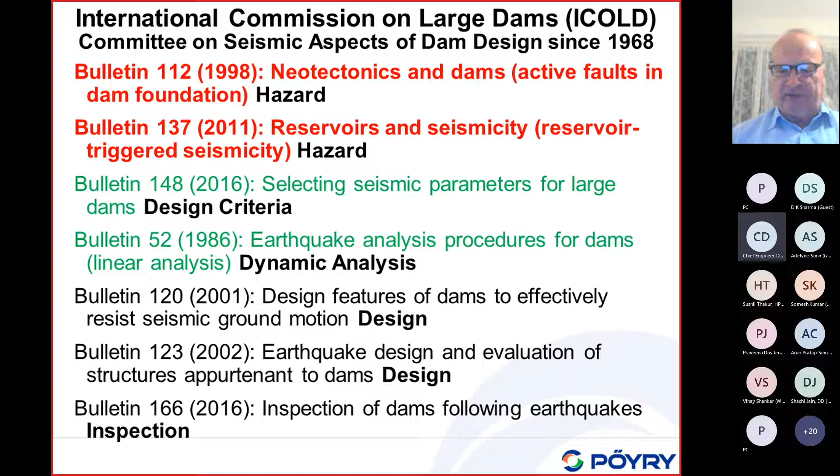Now, the presentations I'm planning to give today and tomorrow are as follows. First, I would like to give some comments on seismic waves in reservoirs, because there are quite some misunderstandings about these. Number two, I will talk about dam safety aspects of reservoir triggered seismicity. Number three, I will talk about seismically active faults and discontinuities in dam foundations and reservoirs. Number four, I will talk about design aspects of Rudbar-Lorestan Dam in Iran, located in a narrow canyon with multiple faults and discontinuities which could be activated during strong nearby earthquakes. Number five, I will say a few words about innovations for a dam on an active fault and high reservoir sedimentation hazard in the Himalayas. And the last one, I will say something about dynamic stability analysis of a gravity dam subjected to the safety evaluation earthquake ground motion. This is also a subject which could not be delivered during the previous workshop number two due to the technical problems we encountered at the end of the second day of this seminar.

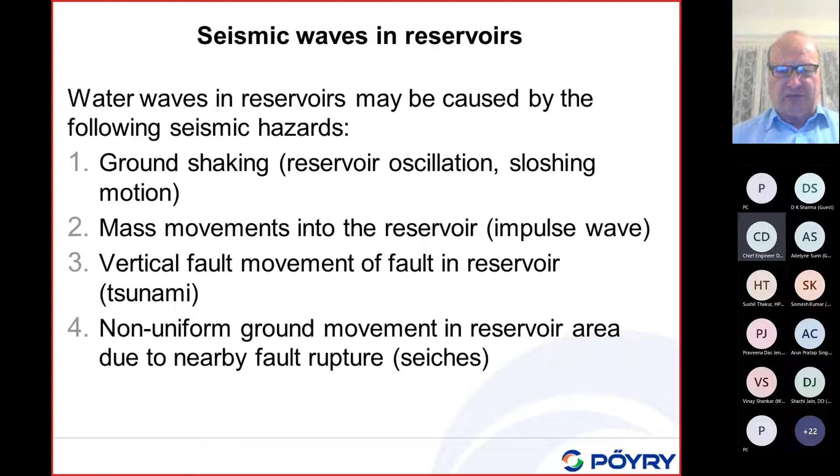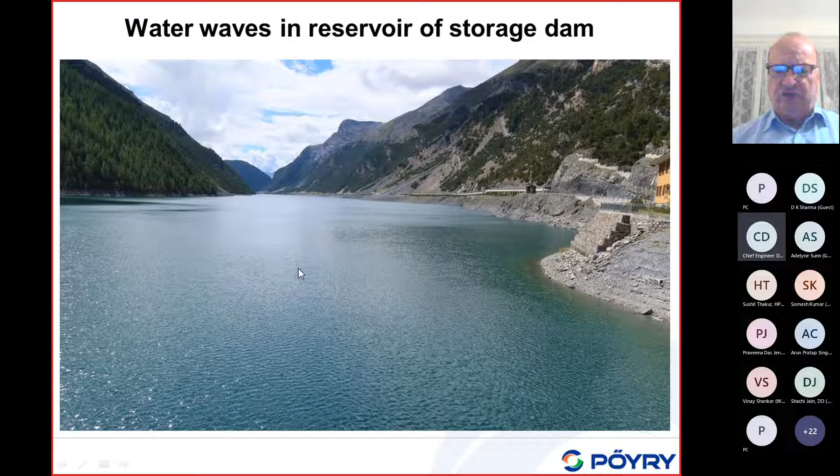Here is a typical reservoir in Switzerland, at the Italian border. I have shown it once. You see here there are some slopes where debris is falling into the reservoir. This is already Italy here; the photo is taken from the Swiss side. So we'll talk about water waves in such reservoirs due to seismic effects.

Now, last time I gave a brief introduction into structural dynamics to discuss water wave oscillations in reservoirs due to ground shaking. It is very useful to make use of this diagram, the dynamic amplification of a single degree of freedom oscillator, because if we consider sloshing motion and the lowest mode, this can basically be represented by a single degree of freedom oscillator. Now, if we look into large reservoirs, the natural frequency is very, very small.

From the earthquake ground motion, we know the frequency of earthquakes is in the range of maybe 2 hertz to 5 hertz, but that of a reservoir may be only a hundredth of a hertz, several minutes. So if we look at this diagram showing the excitation frequency - the earthquake, 2 to 5 hertz - divided by the lowest eigenfrequency of the reservoir, maybe 0.01 hertz, we get a ratio which is not 3, but about 100. At 100, the dynamic amplification factor will be extremely small, as shown in this resonance curve for different damping ratios, and we know damping in water is very small, almost zero.

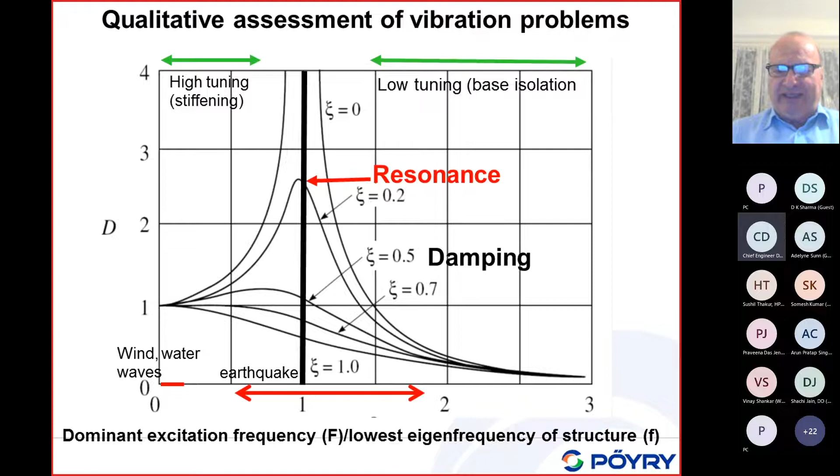So therefore, we don't have large sloshing motions during strong earthquakes. This is different in liquid storage tanks, which have diameters of only 10 or 20 meters, not more. But in reservoirs for dams, we have characteristic dimensions corresponding to the crest length, several hundred meters, so the eigenfrequency is much smaller. Please note that large sloshing motions in reservoirs due to seismic effects only occur in small reservoirs, basically tanks, which are not relevant for dams.

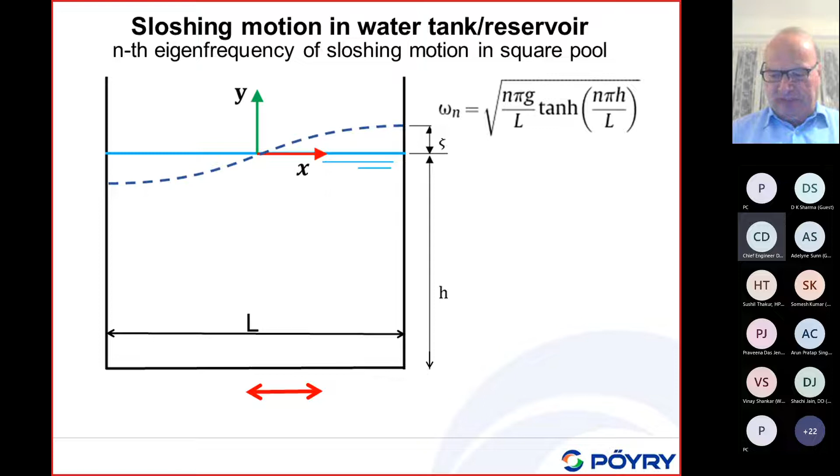So the ground acceleration does not create large waves in the reservoir.

Now, I have shown this photo before. This is from Kasho Gravity Dam in Japan, where the Japanese have strong motion instruments at the base, in a control gallery, and on the crest. In addition, they measured the water depth in the reservoir. This dam was subjected to a magnitude 6.7 earthquake, which is quite strong, because the ground shaking recorded at the dam body was about 0.5 G.

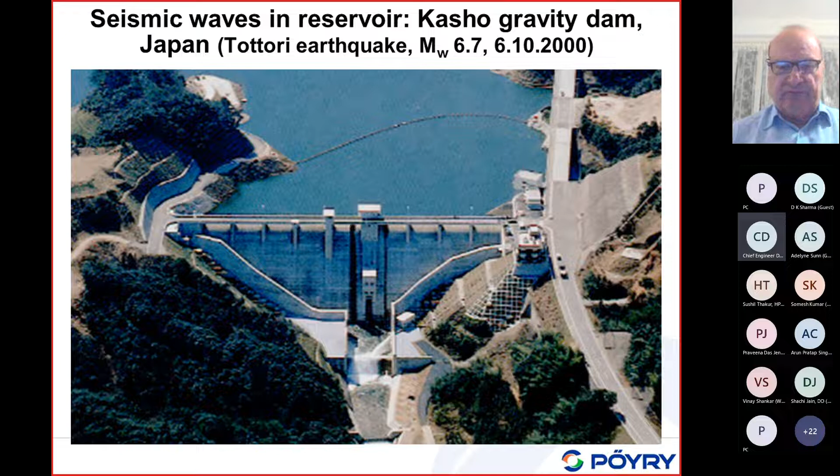0.5 G is quite a large number, but I would say it is also representative for the dams in the foothills of the Himalayas. From the water level measurements, you could see this free vibration of the reservoir after being subjected to 0.5 G, a high value. The maximum amplitude is 6 and the minimum is 4, so the wave height, in centimeters, is 10 centimeters.

So during a strong earthquake, you have only very small water waves, which is contrary to water tanks and swimming pools, where for the same earthquake this water wave could be 1 meter.

But in large reservoirs this is very small. From this free vibration oscillation, if you do a Fourier spectrum calculation, you will find that the eigenperiod here is about 6.5 minutes, about 400 seconds, corresponding to 0.0026 Hertz, and the damping ratio, which gives this decay with time, is about 2%.

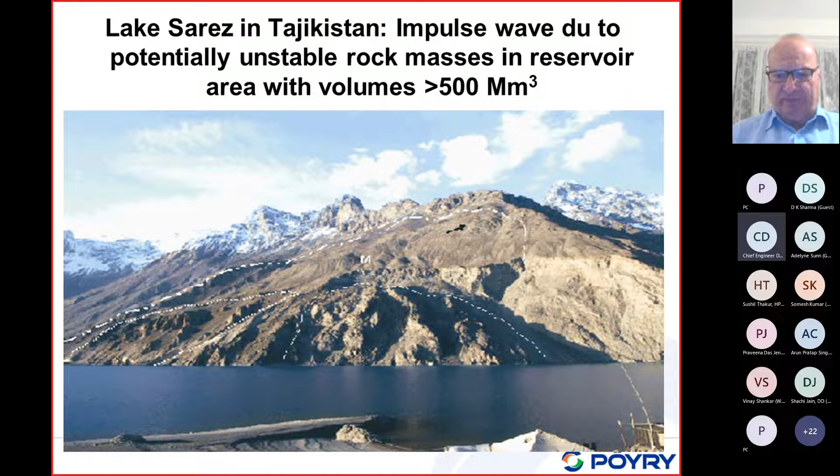So landslides, mass movements into the reservoir, are the most dangerous hazard. And these landslides may be triggered by strong nearby earthquakes.

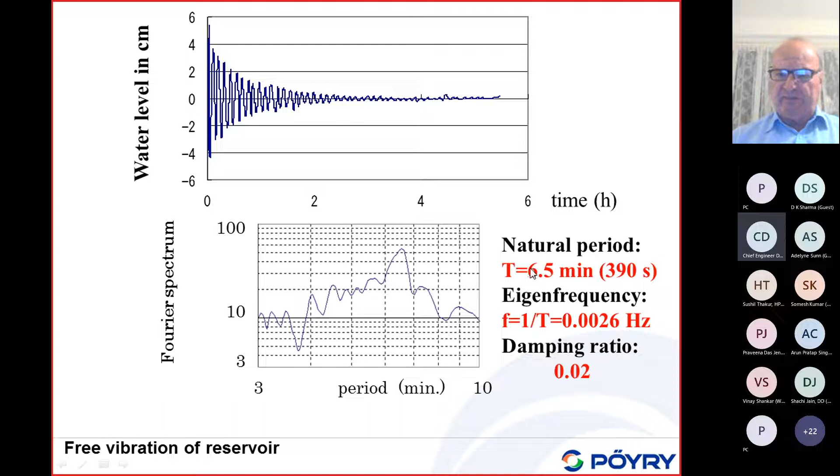It overtopped several times during a few minutes because of the oscillation. As shown previously, from the Kasho Dam in Japan, the natural period of a reservoir was about 6.5 minutes. So you have to imagine that if we have a big wave, a big amplitude wave, it will overtop during a few minutes and move back and come back, because the damping of this seiche is relatively small, as we have seen. So several overtoppings occurred during that earthquake.

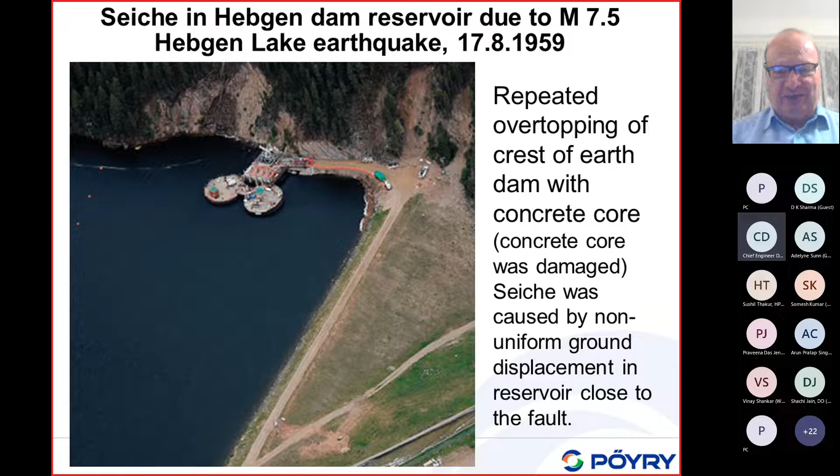Now I would like to discuss Hebgen Lake briefly, because it is, I would say, the only example where big seismic water waves have occurred in a reservoir which overtopped the dam crest. And we know, of course, overtopping of an embankment dam is much more dangerous than overtopping of a concrete dam.

We see here an aerial photo after the earthquake. This is the dam here, and we have a spillway here. It looks like the reservoir is here, and you could probably see this fault passing nearby - it passes very closely to this reservoir. This magnitude 7.5 earthquake basically occurred here.

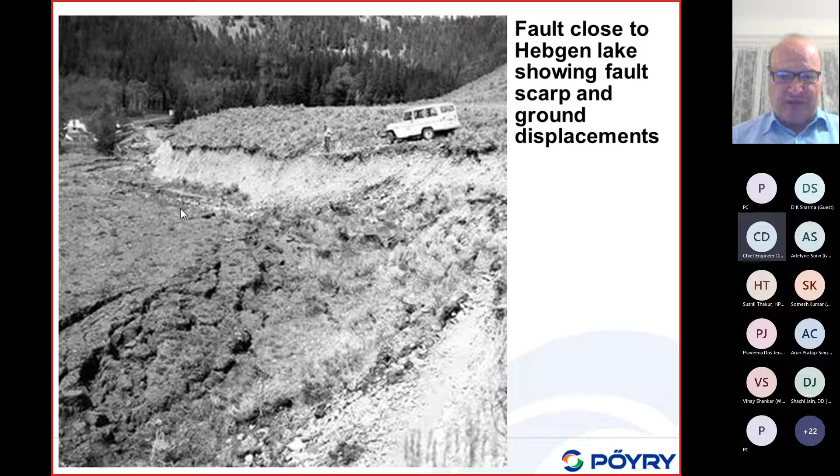If I go back here, this is the fault scarp. It gave some deformations here and here. So the ground moved vertically, and due to this non-uniform vertical movement, it not just moved by about 4 meters at the fault scarp, but it also moved in a non-uniform way near the reservoir, and this then involved the reservoir.

So due to the ground displacement, which has a very slow period, the natural frequency of the reservoir could be excited, which is not possible by ground shaking alone. This is due to ground movement - the oscillation in the reservoir could be excited, which caused what we call in the literature, seiches.

So many people talk about seiches when they talk about water waves, but seiches, I must say, this is really the only example reported which is important - when a very strong earthquake occurs near the reservoir, as in this case.

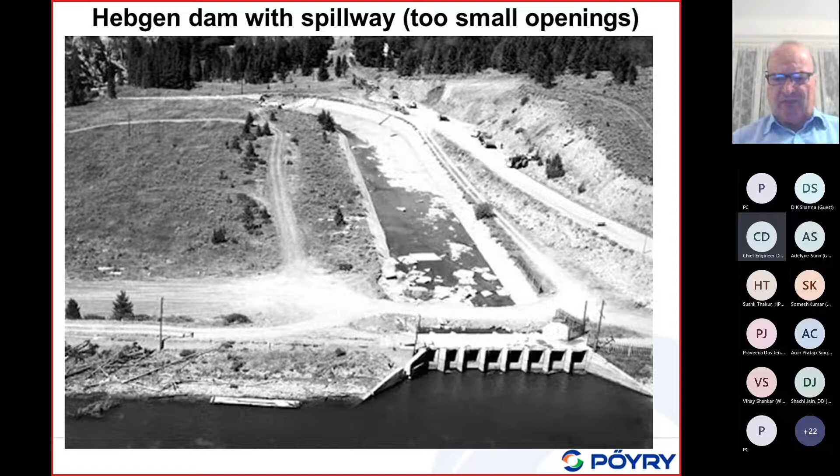It's like a culvert with a small opening, and if you have a small opening, it can be blocked very easily by floating debris. That is just a side comment, but I would also like to mention, once the whole reservoir will oscillate, will slosh, and overtop, you cannot prevent it by the spillway, because it's the whole mass of a reservoir which oscillates, so the spillway will provide only a small damping. It is not essential.

So I would also like to use this example to show that strong earthquakes can create natural dams. And I think in the Himalayas, when I traveled quite a bit, also north of Kashmir in Pakistan, when we traveled along a river, I thought I have seen many locations where such landslide dams have occurred. Also in Iran, I have seen plenty of them.

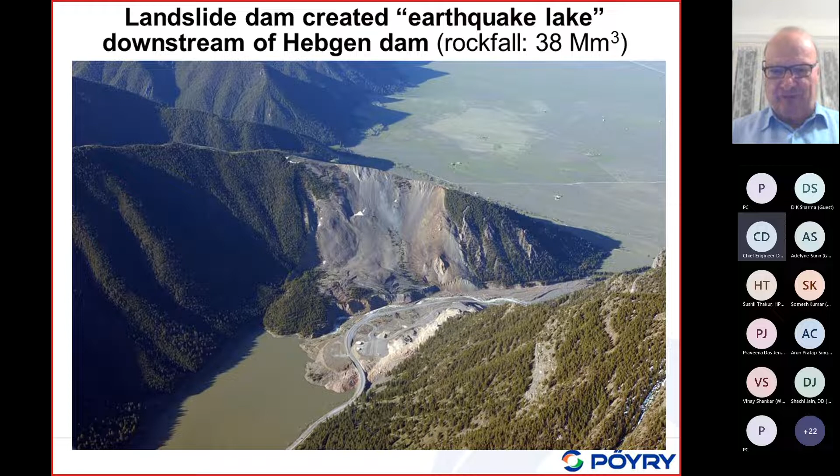So this was my introductory comment, and I would like to go now to the main subject, which is reservoir triggered seismicity. Here, when we talk about reservoir triggered seismicity, I would like to talk about the implications of reservoir triggered seismicity on dam safety. I think that is basically the main concern of the dam engineer.

Okay, it was already mentioned, Mr. Sharma has given, of course, a very nice introduction, and he has covered the important issue in a very condensed way, but he has addressed all the important aspects of reservoir triggered seismicity.

I would just like to repeat some of these issues about the official ICOLD terminology. We have the old, I would call misleading, term where people talk about reservoir-induced seismicity. It is misleading because some people may believe, and I think especially those who are critical about dams, that by filling a reservoir of a large dam, you create earthquakes. This is a wrong perception. The right term which we have adopted in ICOLD is not induced, it is called triggered seismicity.

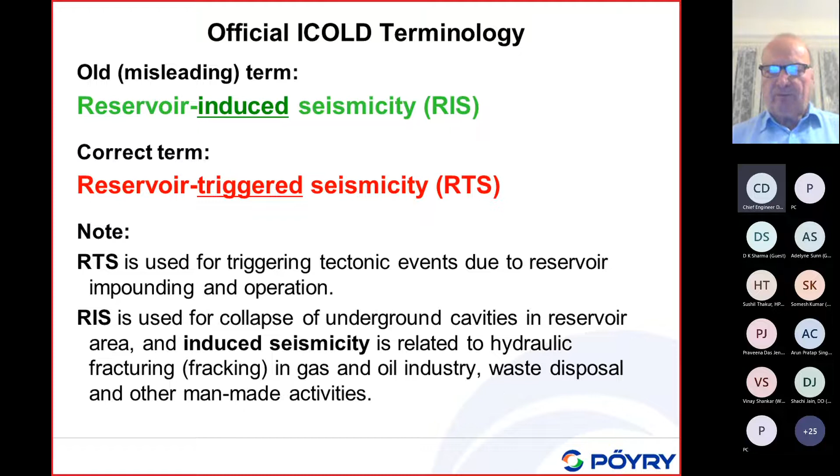I would like to mention that ICOLD has addressed this issue on reservoirs and seismicity, in ICOLD Bulletin 137. You should be able to get access to this bulletin if you are a member of ICOLD, so you should get a free copy there. The different aspects of reservoir triggered seismicity are discussed, and it is not a guideline, but we have given it the title State of Knowledge, based on the experience up to that point. It is a kind of summary, but it is not the final knowledge about reservoir triggered seismicity.

Now, of course, the basic question which comes up is: is reservoir triggered seismicity a safety concern for large dam projects? This is, of course, the most important question which we have to ask, and I'm trying to explain that in a following presentation.

Now, what are the basic requirements for reservoir triggered seismicity? Mr. Sharma also mentioned that, like earthquake prediction, the prediction of reservoir triggered seismicity, especially the strongest events, is important. If we talk about prediction, we are basically interested in predicting the strongest events. We are not interested in very minor events which do not cause any harm, which do not disturb any people, or which cannot even be felt but can only be recorded. As engineers, we are not interested in such events. We are interested in the strongest events.

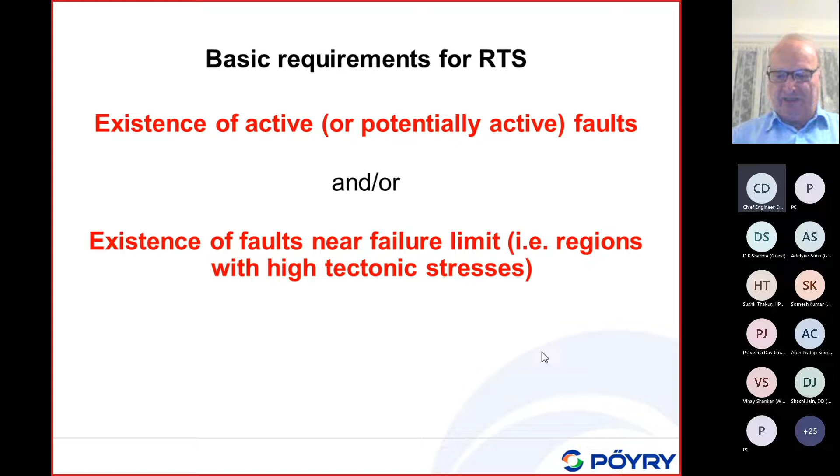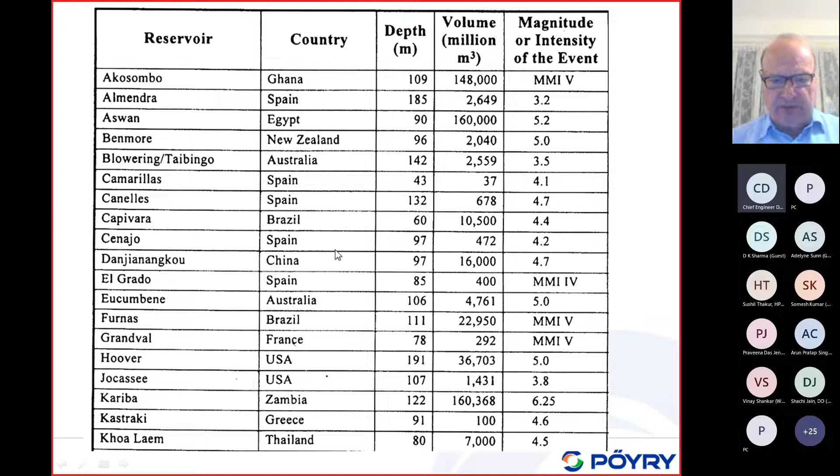If I go further up, I don't see anyone in India yet. If we go here, okay, here we are. You see the Koyna is also listed here, about 100 meters high, reservoir 2 billion cubic meters, magnitude 6.3. Here in 1967, Kremasta in Greece, an embankment dam. This is a gravity dam, also magnitude 6.3. And we see here also in Greece 5.8.

Oroville in the US, where you just recently had a problem with spillway safety, which created some problems, but there was also quite a strong reservoir triggered earthquake there. There are some other strong ones, even in Thailand when I was there, and I even felt that one in the Bangkok area, a magnitude close to 6. And there is this famous one, also mentioned, in China, Xinfengjiang, a magnitude 6 earthquake.

The Xinfengjiang and Koyna earthquakes are earthquakes which created damage to the dam, with magnitude 6 and 6.3. The Koyna dam, there is some controversy usually with these strong earthquakes, because it is quite obvious that the dam owners contest the claim that such an earthquake may be due to filling of a reservoir, but there are, on the other hand, geologists or earth scientists who are convinced that it is reservoir triggered, though the basis of evidence that it is reservoir triggered is usually quite small.

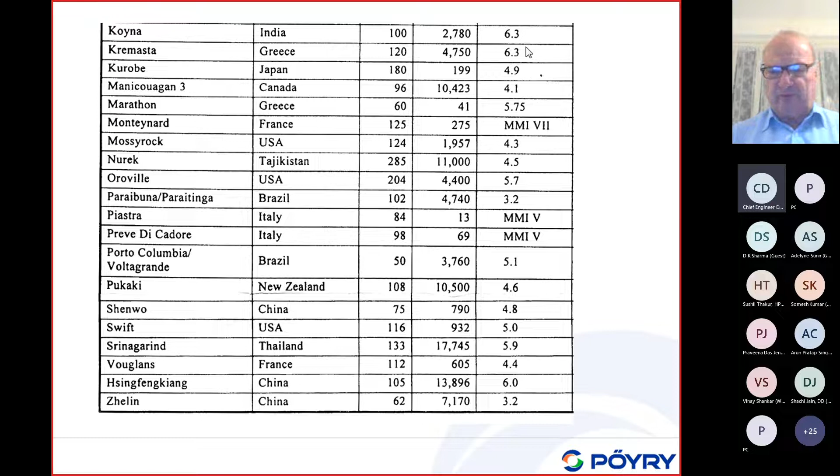So this is still a big problem, and I will give an example on this issue. But 6.3 is the important point you have seen. There are about 3 earthquakes with magnitudes in the range of 6.3. Maybe some people say 6.4 or 6.1, but it is about 6.3 in that range. 6.3 is quite a strong earthquake, and as you know from Koyna, there is also a village, Koyna Nagar, where about 100 people were killed in their buildings because they were not designed against earthquakes. So this is this list.

Now, what are the main features of RTS? Just to go back to this list, as I mentioned, RTS may occur everywhere, and it is basically not possible to predict the magnitude of a maximum event, and even to predict if such seismicity will occur at all.

So people are suspecting that maybe some seismicity may occur in certain types of reservoirs and in certain seismotectonic regions. Now, what are the main features of RTS? Number one, the seismic events during and after impounding are more frequent than background seismicity before impounding.

Background seismicity would be the natural seismicity, but due to impounding, you may have more frequent or even stronger earthquakes. Number two, with the increase of reservoir level and variation of water level, the number and magnitude of RTS events increases. I think the Aswan Dam is such a case in Egypt, where due to variation of the water level, which is actually quite small, maybe only 10-15 meters. In Switzerland, we have variation of reservoir levels of 60 or 100 meters in very high dams.

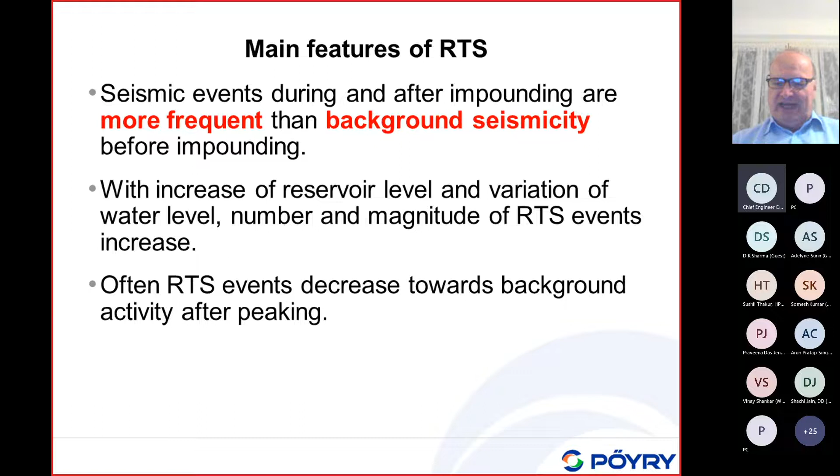Number three, often RTS events decrease towards background activity after peaking. Therefore, like in Brazil, as somebody wanted there, they are not a problem for existing dams, or let me say older dams. It is basically an issue of new dams. If a dam has been there for 50 years, it is very, very unlikely that you have some seismic event which can be due to reservoir triggered seismicity. So the events decrease as a function of time.

Now, if we look based on the list which I've given previously, if somebody wants to make a small statistics, what is the frequency of reservoir triggered seismicity? In the previous list, we had about 6 earthquakes with a magnitude larger than 5.7. The number of dams with a height larger than 100 meters worldwide at that time was about 400. And therefore, the conditional probability of RTS with a magnitude larger than 5.7, for a dam larger than 100 meters, would be 6 events divided by 400, makes 0.015.

So you could say if you have over 100 meter high dam, purely from a statistical analysis, you have about a 1 to 2% probability that you may have a reservoir triggered earthquake with a magnitude larger than 5.7, and 5.7 may already be a dangerous earthquake for poorly constructed dams. But a magnitude 5.7 is certainly not a problem for a well-designed, well-constructed, and well-maintained dam.

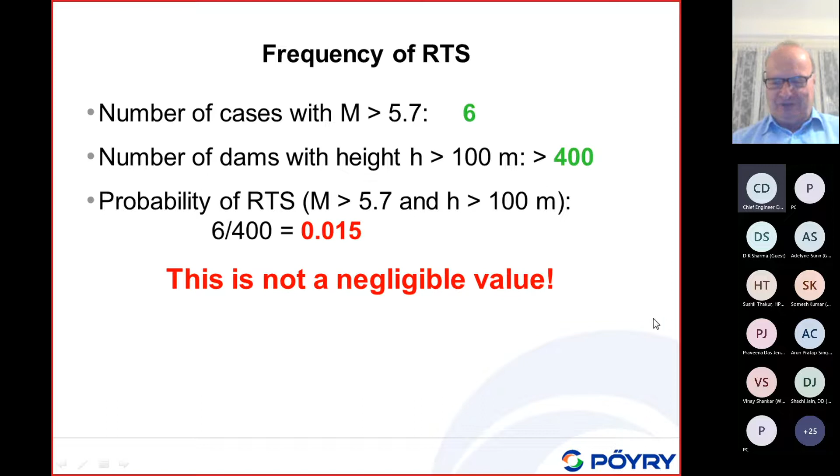So it is just given here, you have quite some probability. It is not a problem for the dam, this kind of earthquake, but as we have seen in the case of Koyna Nagar, a significant number of people were killed in the buildings because the buildings were not able to withstand this magnitude 6.3 earthquake. But for dams, it should not be a big problem. What I want to say is a probability of 1 to 2% is not a negligible value, so we have to take care of that.

Now, which were the large dams subject to really strong RTS? It is the Xinfengjiang Buttress Dam in China, 105 meters high, 1962, magnitude 6.1 earthquake. The dam was damaged with some cracks, longitudinal cracks near the crest, and was strengthened subsequently. Also, the seismicity here at this location is still very high. People have recorded more than 100,000 events, but they are very small events.

The second event is the Koyna Gravity Dam in India. I would like to say buttress dams somehow are also a little vulnerable against earthquakes. Nowadays, people do not build buttress dams - it is too labor intensive. People build RCC gravity dams, but not buttress dams anymore. But in the 50s, 60s, and so on, people were keen on building this kind of dam. Now, the Koyna Dam is about the same height. It was subjected to a magnitude 6.3 earthquake in 1967, and also the dam was damaged and it was strengthened. I will show it briefly.

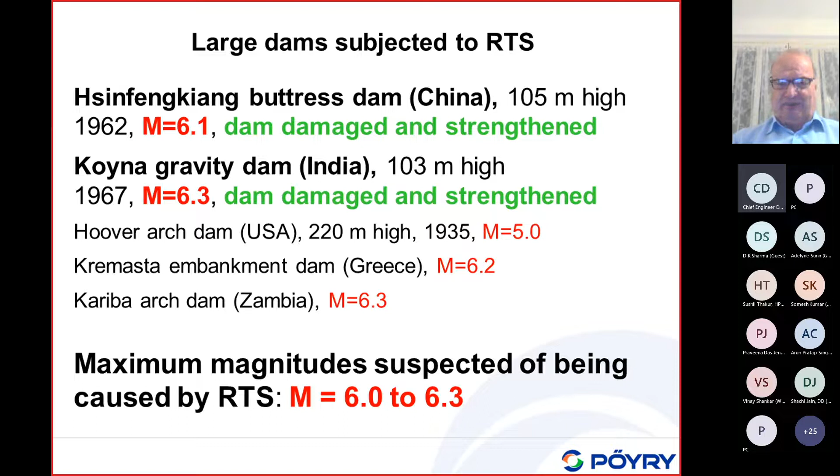It is clear why no dam owner wants to be responsible for that, because, let me say, in some places like Koyna Nagar, people get killed when people ask for compensation. So it has some legal aspects. It is really not a simple issue from that point of view.

Now, what I mentioned already, the maximum observed or suspected RTS magnitude is about 6.3. The question is, is it possible that stronger earthquakes could be triggered? Because for the safety evaluation earthquake, safety check of dams, as I've explained during the previous workshop, we have to deal with the worst case earthquake scenario, which involves much stronger earthquakes. In the Himalayas, even in Switzerland, we think upper bounds in some areas is maybe magnitude 7. In the Himalayas you can have earthquake magnitude 8 plus. You can have very large events.

So therefore, the question is, is it possible that due to impounding of a reservoir such strong earthquakes could be triggered? Because if such a strong earthquake occurs, there must be some trigger - if a fault is very close to failure, it needs only some small trigger for this earthquake to actually start to occur. Of course this you cannot predict, and the trigger could be only a very minor event, but it could also be some buildup of pore pressure.

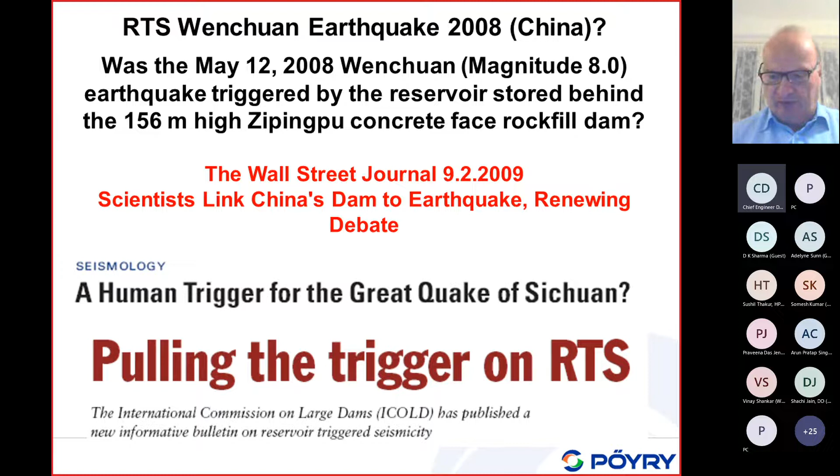Based on this discussion, an article appeared even in the highly respected journal Science. Our committee, myself with my Chinese colleague, were then able to reply in Science magazine that this earthquake was basically not due to impounding of a reservoir. But I would like to discuss this case briefly because it's an important one.

I mentioned before that the maximum magnitude was 6.3. The Wenchuan earthquake had a magnitude of 8, or 7.9, and tens of thousands of people were killed. It's a very big issue. Let me explain a little about the situation of the plant.

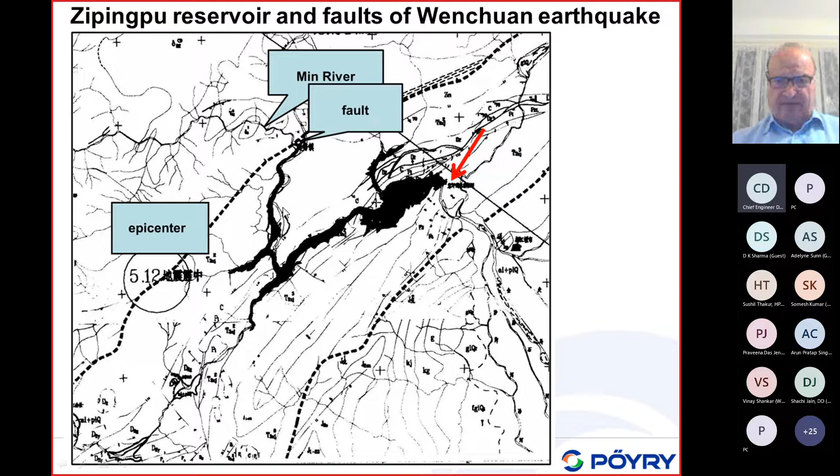So there were different kinds of arguments that filling of the reservoir affected this fault. If the fault plane is here, already before the earthquake we had a groundwater table which was basically already near the surface. Therefore, due to filling of the reservoir, the groundwater table did not change a lot, only very minor. So the additional pore pressure generated in the area of the fault plane is very small, because the natural groundwater table was already very close to what was observed during full reservoir conditions. That's the situation here.

Because this is a big reservoir, people installed a microseismic monitoring system, and it's important to record the natural seismicity prior to the earthquake. Impounding started around 2005, about 2 to 3 years before the earthquake. This shows the maximum magnitude observed prior to construction of the dam or filling of the reservoir. If you just look at it optically, we don't see any anomaly.

But in May we have this strong magnitude 8 earthquake which occurred here. So there's no sign of increased seismicity prior to filling of the reservoir. Also, the highest water level in the reservoir occurred in 2006-2007. At the time of the earthquake, the reservoir was only 30% full, almost empty. But of course, if you have pore pressure to dissipate, it may take some time.

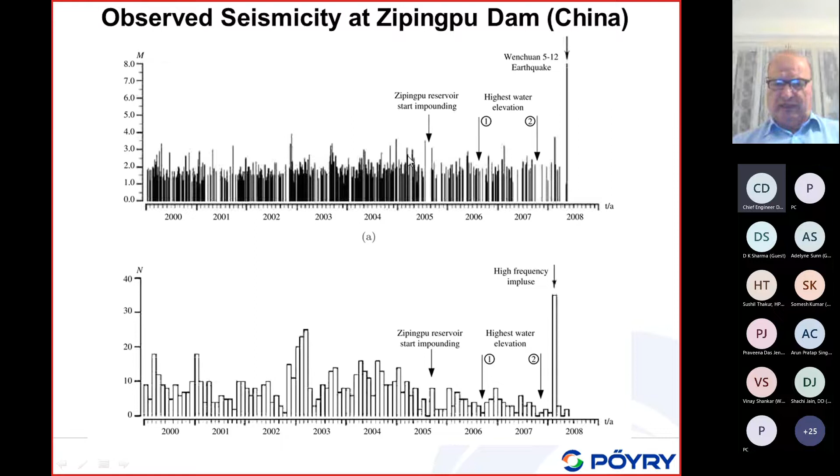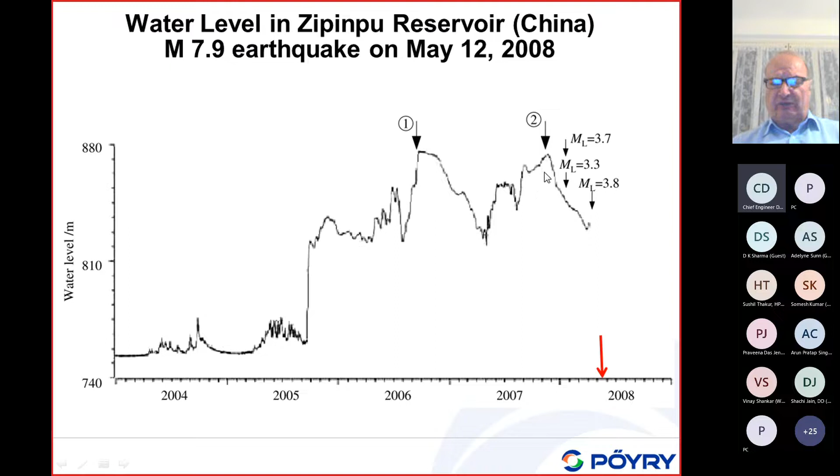This shows the filling of the reservoir, which started about 2005 and reached its maximum in 2006 and 2007, with the main shock, magnitude 8, occurring in 2008. Before that there were some shocks of 3.7, 3.8, but as shown here, there were already several such shocks prior to impounding of the reservoir too. So there is no clear correlation between the reservoir level and the size or frequency of earthquakes.

So, what was the conclusion of our reconnaissance mission? Basically, there exists no evidence that supports the assumption that this earthquake was triggered by the Zipingpu reservoir.

This is, in short, the conclusion which we have drawn. I would like to mention that the earth scientists, geologists, seismotectonics people, seismologists, are still convinced that this earthquake was triggered by the Zipingpu reservoir. It's the same like in the Koyna Dam case; the earth scientists are also convinced that the Koyna earthquake was triggered by filling of the reservoir of the Koyna Dam. We have to live with that.

We cannot convince the earth scientists away from their beliefs. But we, as engineers who are in charge of dam safety, have to take the corresponding measures. I must say we have better reasons, or maybe not better reasons, but reasons to argue against the claims based on hypotheses by earth scientists, because they do not have any clear evidence.

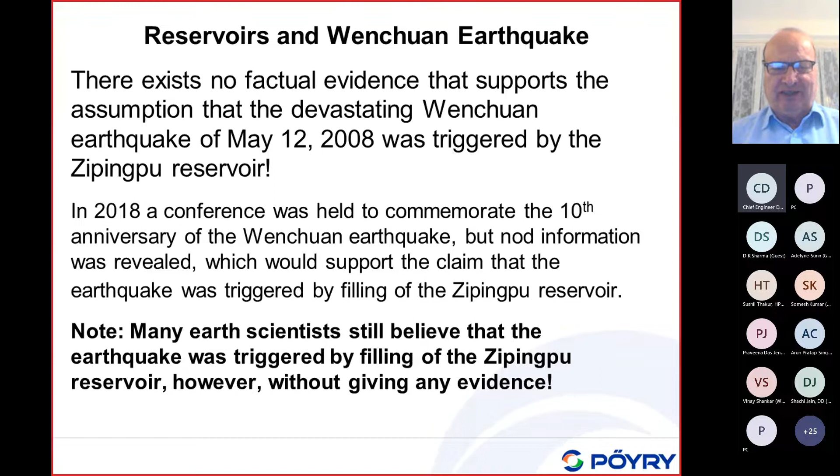This is a very important case, because the magnitude of 8.0 would actually be the magnitude of a maximum credible earthquake that would have been triggered by filling this Zipingpu reservoir. It is, as I said, really a very important case.

Now, if we look into some of the highest dams, an example of reservoir-triggered seismicity is the Nurek Dam in Tajikistan. It's the world's highest, at the moment still, the world's highest embankment dam. There are two under construction which are higher: one in Tajikistan, the Rogun Dam, and the other one in China, also slightly over 300 meters high.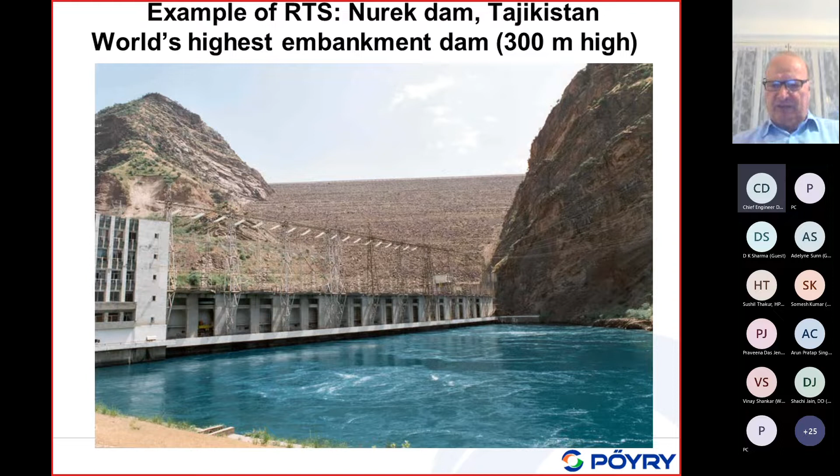So now, what has been the damage due to RTS? As engineers, if we have to answer this question, we must also know what are the possible explanations of the damage which has been observed. Number one, Koyna Dam, as I mentioned.

Koyna Dam is a 103 meter high straight gravity dam. It has an unusual shape, which I will show, because it was decided during construction to heighten the dam, and therefore it has some unusual shape. The second one is in Hsinfengkiang, a buttress dam, from 1962.

In general, the earthquakes that caused this damage are suspected of being caused by RTS, because there is no clear evidence. I think the Chinese have probably accepted that it is reservoir-triggered seismicity; in India, people are not of that opinion. In both dams, these earthquakes are near the dams and are shallow focus earthquakes, so the peak ground accelerations on the surface are quite high. Both dams developed substantial longitudinal cracking near the crest.

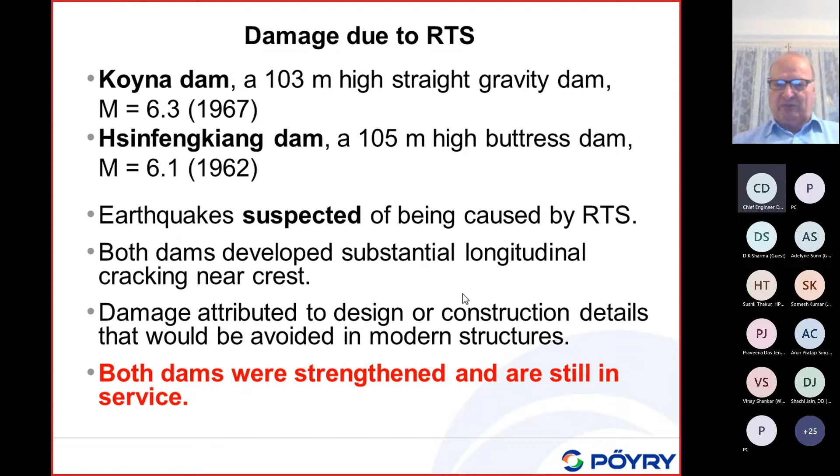So if we look now into the Koyna Reservoir, as Mr. Sharma has already mentioned, there have been a number of events with magnitude larger than 4 after the main event of 6.3 magnitude, with different periods of increased seismicity. What is shown in this diagram is the reservoir level, with annual cycles of reservoir operation. The reservoir was filled in '61, but the main earthquake occurred in '67, about 6 years after impounding. Afterwards, due to reservoir fluctuations, the amplitude is about 40 meters, from 660 to 620.

So the seasonal fluctuation of the reservoir level is about 40 meters, and there have been some earthquakes with magnitude larger than 4 in subsequent years. But as mentioned, seismic records show a large number of very small earthquakes that cannot be felt by people. The important issue is that the number of earthquakes and also magnitude has decreased over time, and it can be assumed that these magnitude 4 or 5 earthquakes are just natural earthquakes, background seismicity. But since there is no seismic data prior to construction of the dam, it is difficult to determine whether these are natural events or correlated with the reservoir.

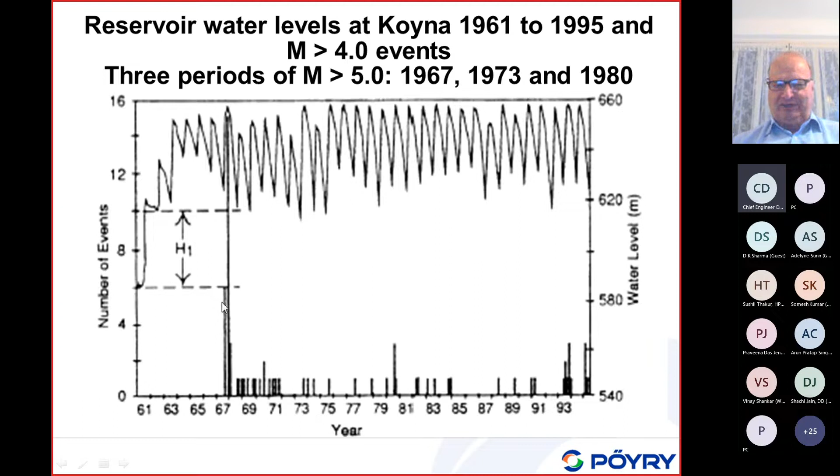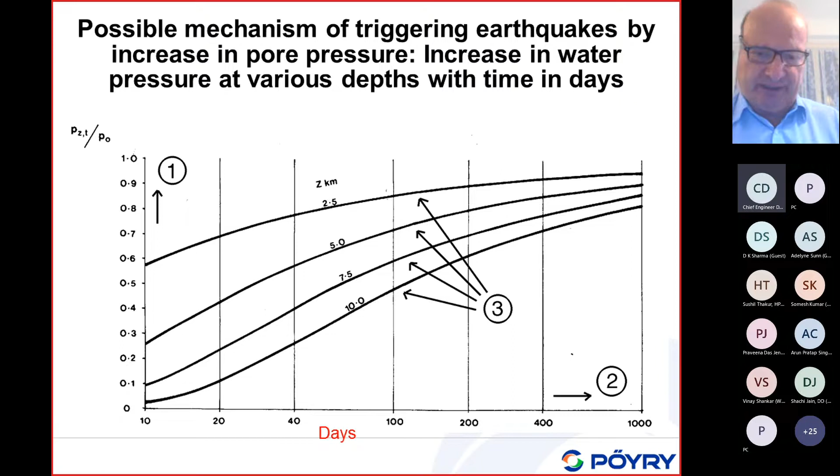after several years, and not just once the maximum was reached. But there are always a lot of discussions—at Koyna, the focus was quite shallow, so it is not clear why it lasted that long. Of course this diagram is very schematic, because the permeability of rock or the buildup of pore pressure at greater depth depends on the geological and mechanical properties of the foundation rock.

Now, to say something about the repair of Koyna Dam, the dam was basically damaged here. As I said, the shape is unconventional because originally it was planned to build the dam at a lower height, but it was heightened during construction. So we have this kink, and these kinks, or points with negative curvature, are points of stress concentration. We also have stress concentrations here and here where damage may occur, and due to ground shaking, we have amplification at this location.

Cracks developed at this location at the dam. After the earthquake, because of this longitudinal crack which developed, there was some repair done by anchors, as you can see, which are anchored below the damaged zone. This was repair of a damage, but afterwards...

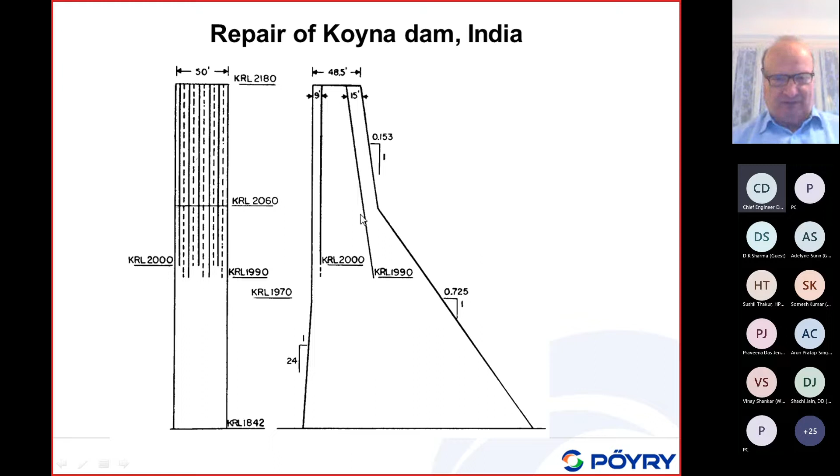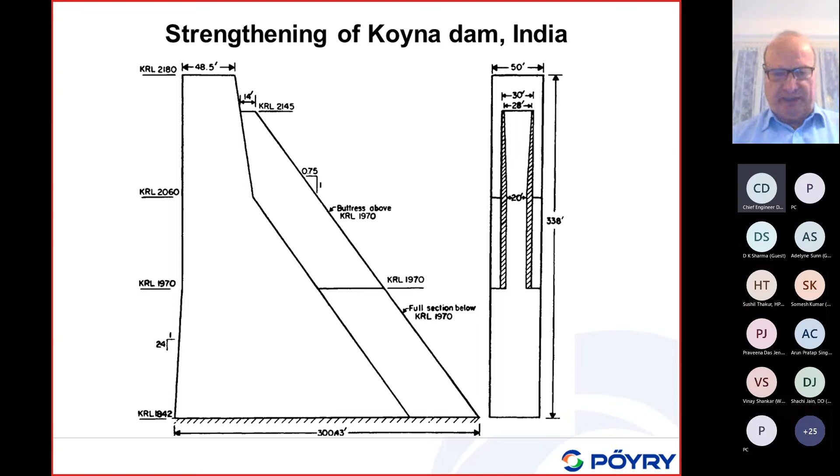So the dam was repaired and strengthened, and strengthening means the dynamic characteristics of the dam have changed. If people had only done the anchors, if a similar earthquake occurred, it would still cause some cracks again, but it would not be possible for this part to fall down. There would still be some damage if you only did this kind of repair. But by strengthening, you change the dynamic characteristics of the dam and prevent that damage from occurring again at this location. So I would say this is a good example to show repair and strengthening of a damaged dam.

Now, with RTS, what are the effects, not only on dams? We must also look into the kind of seismic hazard. I've shown this slide again, that due to earthquake, you can have different hazards. One hazard is ground shaking, another is mass movement into the reservoir.

You have fault movements, fault displacements. I would say fault movements and fault displacements in the reservoir would be very minor because RTS events are generally small, so surface rupture will be almost zero.

It's not a main hazard for RTS. However, we will have, in addition, smaller events. If you have repeated earthquakes, it gives a sound of cracks, it gives noise. We had a case in Switzerland where we built a dam, Contra, roughly 220 meters high, where due to stress redistribution, some cracking occurred with magnitudes of about 2 or 2.5, which are no problem to any buildings and had no effect on the dam, but it gave these cracks in the night and people could hear it, and so they were disturbed. Once you hear this kind of noise, people were concerned about the safety of a dam because it was related to the dam.

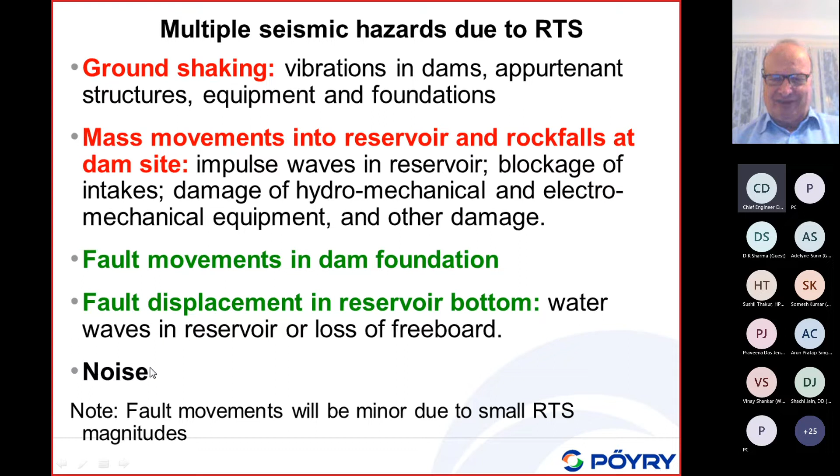So the noise - basically the three factors in reservoir triggered seismicity which you have to consider are ground shaking, mass movements, and noise. I would like to discuss that briefly.

Rockfall hazards at dam sites, because rockfalls could be triggered by RTS. This is very clear - it must not be due to the strongest earthquake only. We see here some rockfalls, and we see here some landslides near a dam, which was then overtopped.

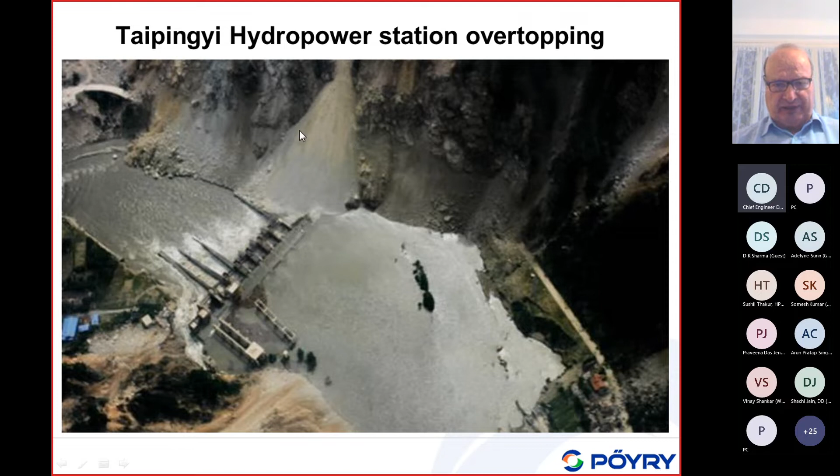So therefore, we could say RTS could create some landslides like that. Of course, RTS will not occur at such a run-of-river power plant because the head is only 20 or 30 meters. So it will not trigger RTS, but it just shows that smaller events could actually trigger landslides. I would like to use it here.

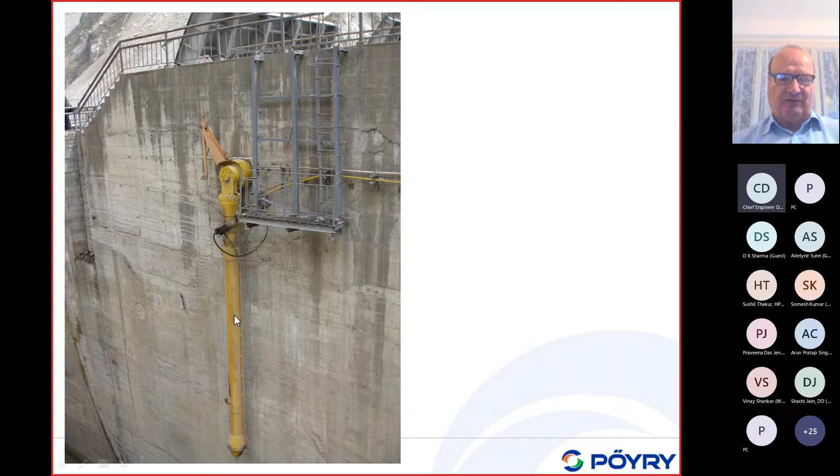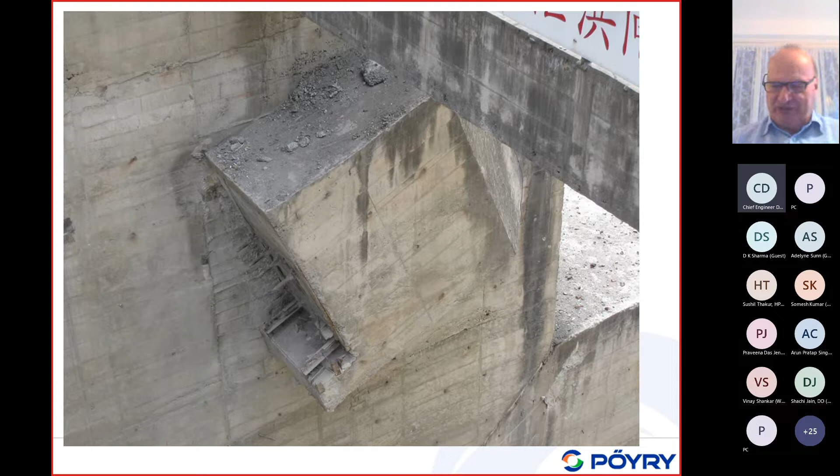If you have some landslides, what could be the consequence? It could be that some rock falls on an arm of a spillway, as in this case - I've shown this photo again. This is the trunnion, the anchor of the arm of a radial gate, where a stone was falling basically on that arm. So we could say even a smaller earthquake, which could trigger a small rockfall, could basically damage gates of a spillway.

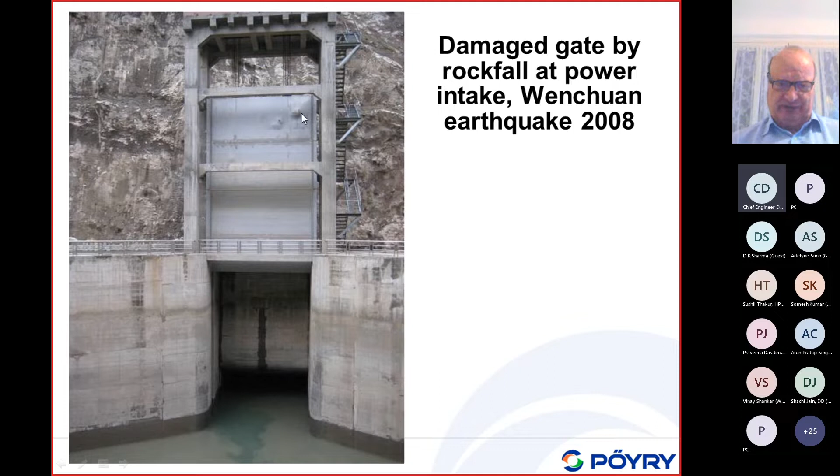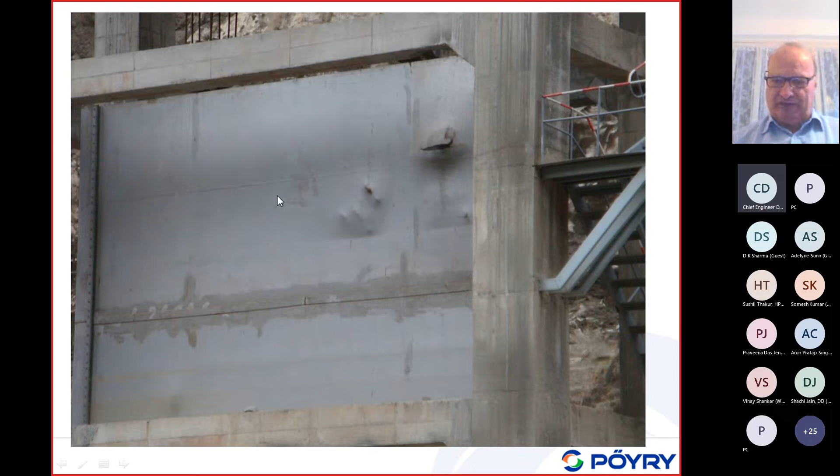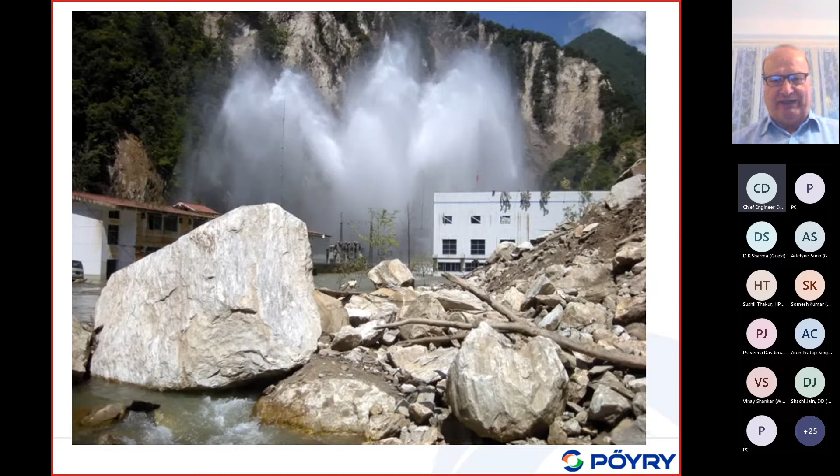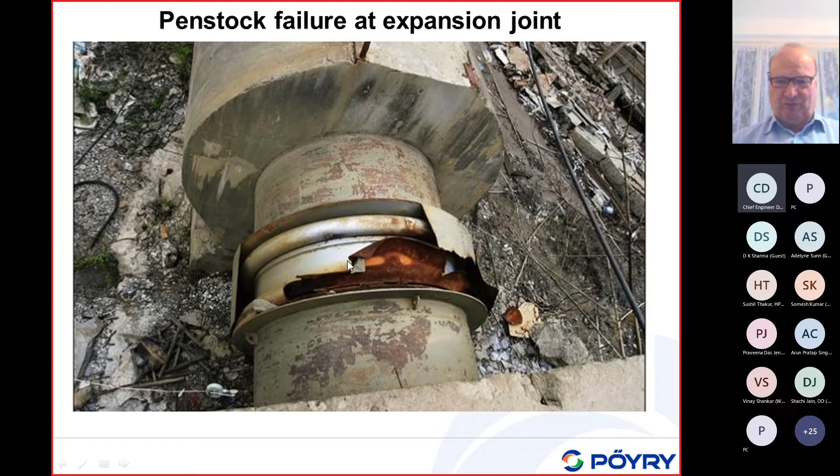Or due to rockfall, we could have damage of this steel plate as shown here, of this gate. Depending on the location, it could also be a rockfall, even triggered by rainfall. If it falls down, it's a relatively thin steel plate, but it could damage that steel plate. So this is a damage pattern which is possible during RTS. I've also shown the failure of a penstock, and a failure of a penstock could also be triggered by a smaller earthquake, if, for example, the expansion joints were damaged by a rockfall, or if some small movements had taken place.

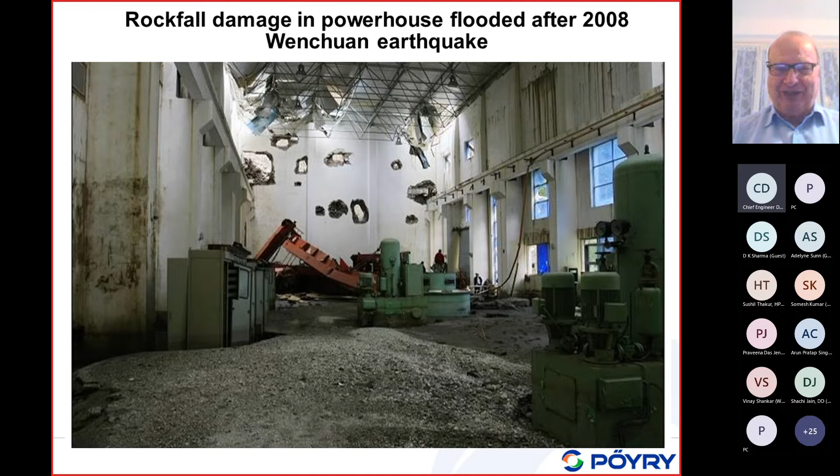Here was some damage due to flooding, due to the rupture of a penstock. So what I want to say is reservoir triggered seismicity, even with smaller magnitude, could still cause vast movements and landslides.

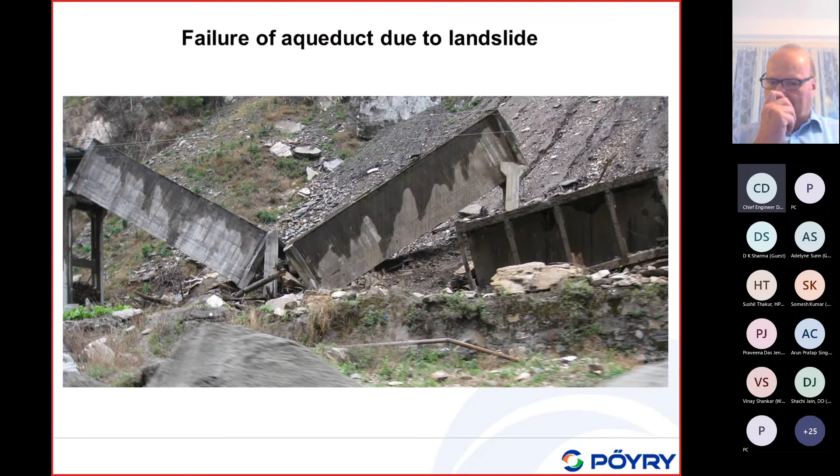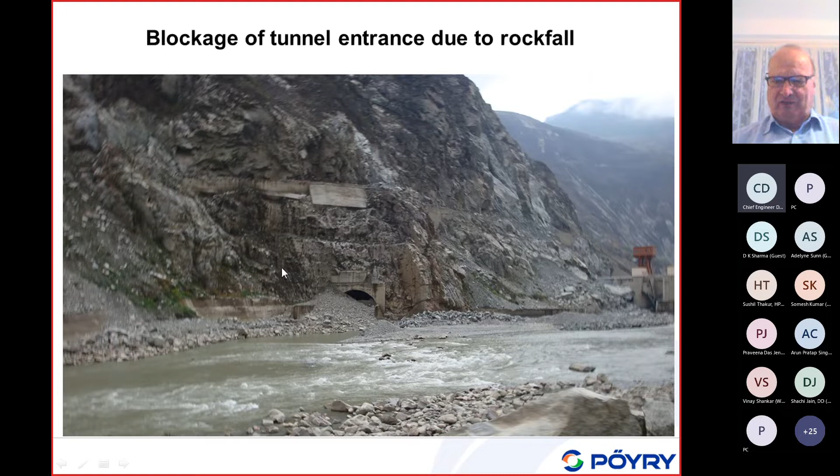This is a photo taken in this powerhouse, and it could damage aqueducts with just a small landslide. It could block tunnel entrances, as in this case, with just small rockfalls. It could still damage transmission lines, like in Iran.

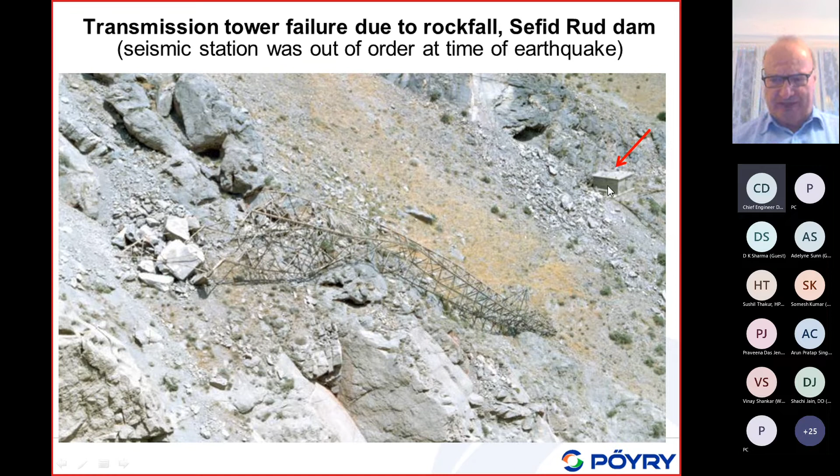I just want to say this was also the location of a seismic station, which was out of operation at the time of the earthquake.

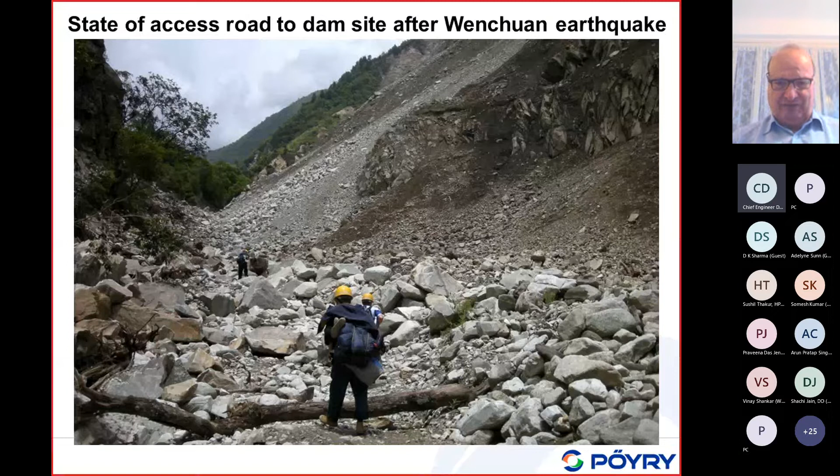As I said, landslides can occur even under smaller earthquakes in hazardous areas. As mentioned, after the rainy season you may have potentially unstable slopes when they are fully saturated, so it only needs a small event to cause landslides.

So therefore, what can we do? We do the monitoring, which is proposed.

The monitoring of a reservoir is very important at locations for dams, I would say, with a height larger than 100 meters, or reservoirs larger than 500 million cubic meters, or where you suspect, based on the seismotectonics or tectonic stress conditions, that there is a likelihood of reservoir-triggered seismicity.

In this case of location, you should install a microseismic monitoring system. It's important to install it before construction, to determine the background seismicity during reservoir impounding and during the first years of operation.

After, I would say, 10 years or so, when you have no special seismicity, you could basically decommission these networks.

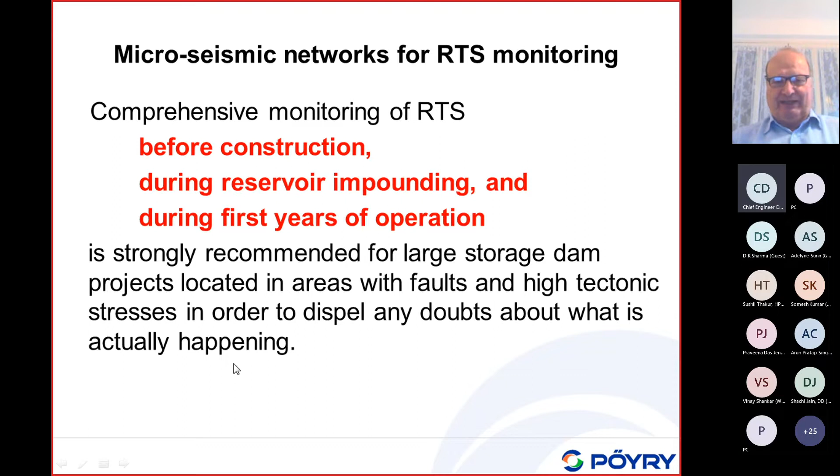This is strongly recommended in areas with faults and high tectonic stresses, in order to dispel any doubts about what is actually happening, because if something is happening, they will basically claim against the owner of this project.

This is a problem. Here, this is one reservoir, was the biggest embankment dam for some time in Iran, in the Zagros Mountains. There are plenty of faults there, and probably like in the Himalayas also.

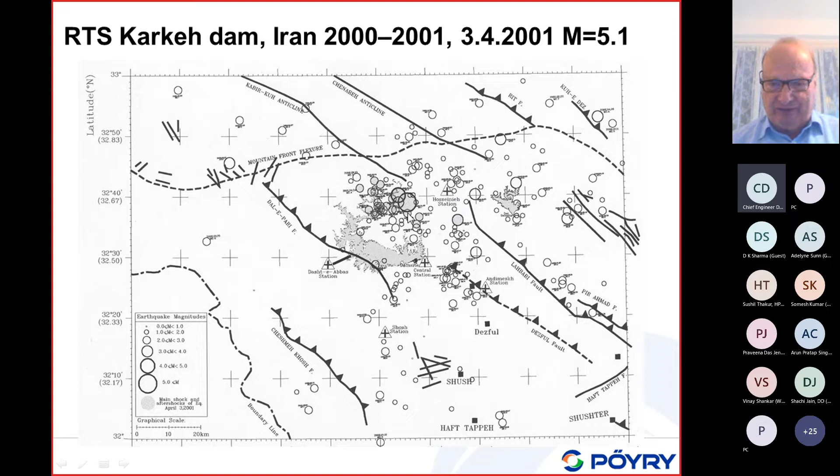They do not just occur along these tectonic features. They were occurring at this location as well.

I'll take another 5 minutes here. A feature is, of course, I mentioned magnitude 5.7 and so on. There should not be a safety problem for well-built, well-designed, and well-maintained dams.

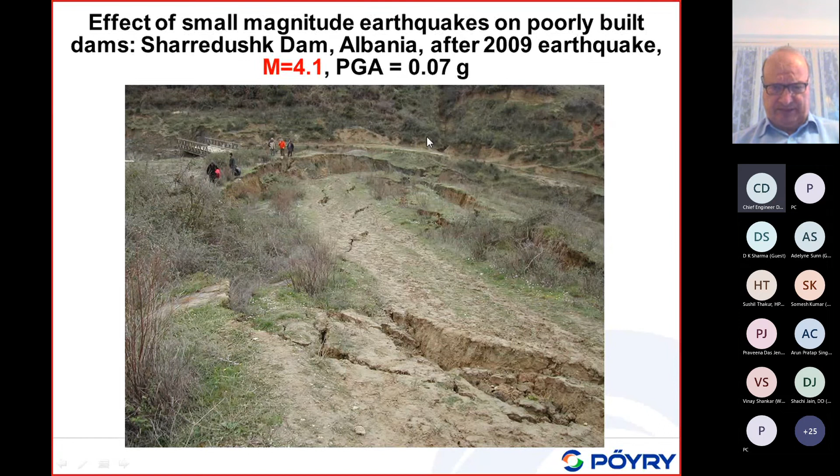But if you have a poorly constructed dam, like this one in Albania, already a magnitude 4.1 earthquake, with a peak ground acceleration of less than 10% of gravity, caused this landslide in the dam body. The reservoir contributed to this large deformation.

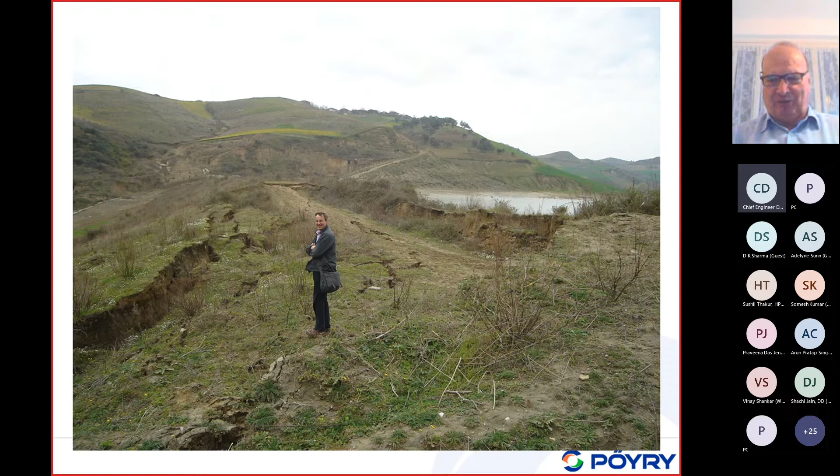Of course, this was an existing dam, it's not a reservoir-triggered event here, but I just want to say that if you have a new dam which is actually poorly built, like this dam here, for example, then still moderate reservoir-triggered events could create a seismic problem for your dam. But this should not be the normal case.

This is a case in Pakistan, in Kashmir. There occurred a strong earthquake in Afghanistan, with an epicentral distance of 300 kilometers and a focal depth of 200 kilometers, in April 2016, with a magnitude of 6.6.

And this was after, I would say, heavy rain as well. This big landslide, which involved 80 buildings—we do not really see it here, but many buildings were moved down—was triggered by a very remote earthquake, 300 kilometers away.

So therefore we can conclude: if we have a reservoir-triggered earthquake in an area where slopes are already quite unstable, with a safety factor of about 1, it could still create a big mass movement, as in this case here—even though it was 300 kilometers away.

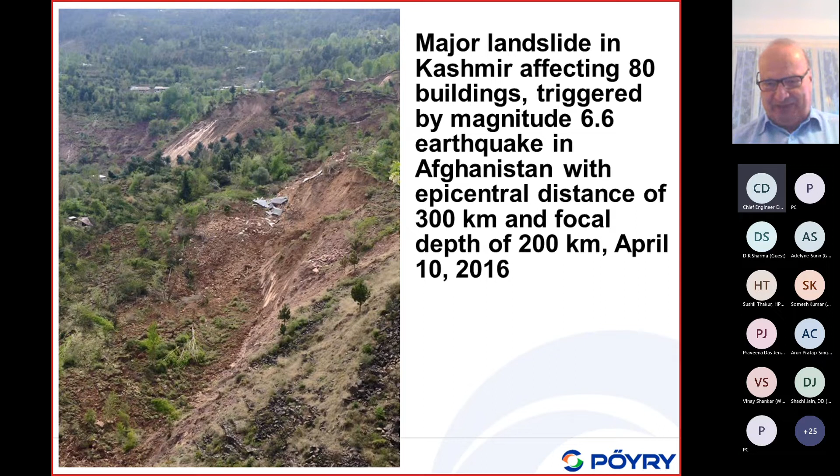Mass movements are a problem which could be triggered by RTS. Now, is RTS a safety concern for large dams? To answer this question, we have to look into the seismic design criteria, which I mentioned last time.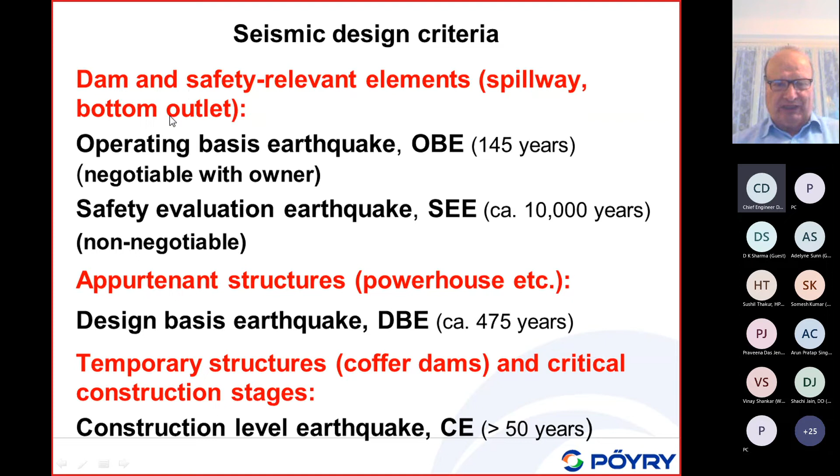Basically, we have a dam and safety relevant elements, which are the spillway and bottom outlet, and they have to be designed against the operating basis earthquake and the safety evaluation earthquake. So these are the safety critical elements and the dam body, which are of main concern. And of course, in addition, we have the appurtenant structures, which I have also mentioned. Now, what are the seismic performance criteria for the dam and safety critical elements?

The dam body, as we said, this is a repetition from last time. Under the operating basis earthquake, the dam body is fully functional, only minor non-structural damage, which is easily repairable, is accepted. For the safety evaluation earthquake, we require that the reservoir can be stored safely, and structural damage, cracks, deformations are accepted. However, stability of a dam must be ensured. That is the traditional performance criteria.

But if we look now into the safety critical elements, which are the spillway, gated spillway, and low-level outlets, we also require that they are fully functional under the OBE, and they are functional also under the safety evaluation earthquake, so the reservoir can be operated safely after an earthquake, because a repair may take a long time.

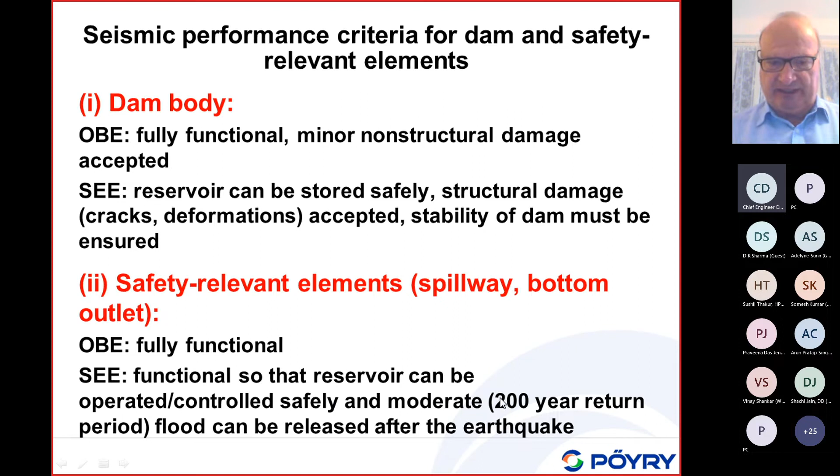Now, what are the implications on the design of this RTS? Since RTS occurs, let me say, for example, just during the first few years after completion of a reservoir or a dam, we can say for a safety evaluation earthquake, the largest RTS event is actually smaller than the so-called safety evaluation earthquake. This is already per definition. So for the safety of a dam, or for the people living downstream who may be afraid of uncontrolled release of a reservoir, RTS is not a problem, because the largest RTS is smaller than the safety evaluation earthquake used for the design and safety check.

However, for the operating basis earthquake, where we make a statistical analysis, we say there is a probability of 50% in 100 years that it occurs. It has to be checked if RTS, which occurs just a few years after completion of a project, is larger than the OBE. If the RTS is larger than the OBE, then the operating basis earthquake, let me say with a return period of 145 years, has to be replaced by the ground motion estimated for the RTS. So it has some effect on the operating basis earthquake.

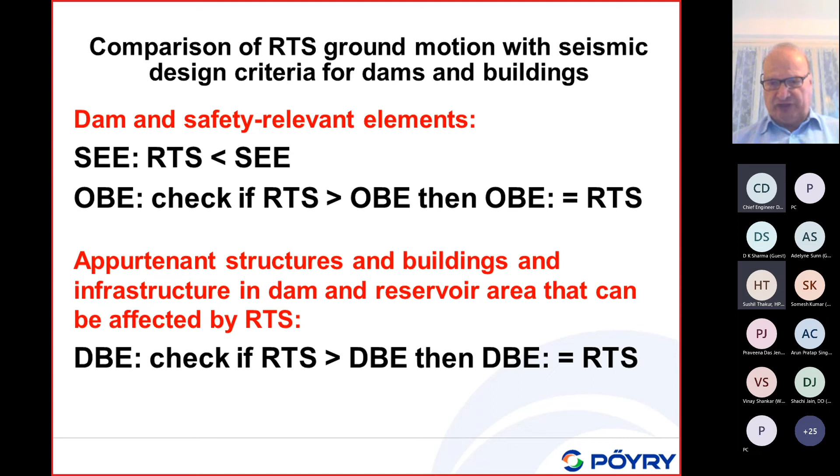That is just for ground shaking. But as we know already, ground shaking is affecting all structures at the same time.

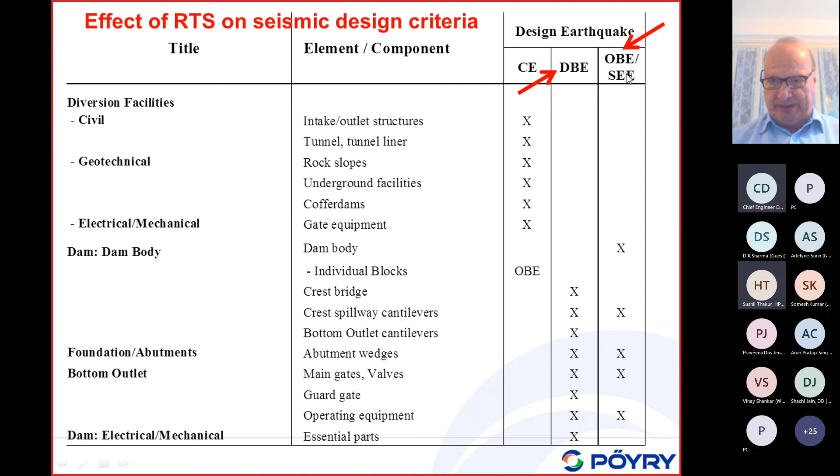So if you look into the seismic safety or seismic design of the different components of your power plant or dam project, you have to check if the design basis earthquake, which is used for design of some components, is exceeded if RTS is bigger than that, or for the dam body and safety critical elements, if the RTS event is larger than the OBE. So it has some effect on the design of appurtenant structures and on the serviceability check of your dam and safety critical elements. But this is important: it has no effect on the safety evaluation earthquake, which is the most important issue for the safety of the people living downstream of the dam.